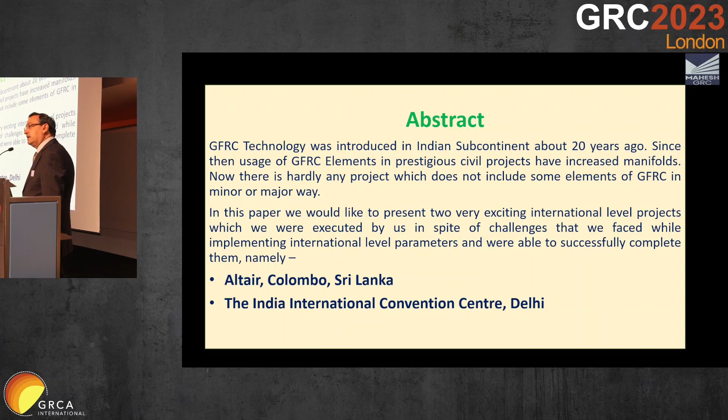First, I would like to briefly introduce my company, Mahesh GRC. We are in this business of manufacturing GFRC for more than 17 years now, and in this period we have done numerous projects and successfully completed them, which includes 5-star hotels, commercial complexes, malls, residences, multi-storied houses, etc.

We take turnkey contracts for supply and installation of GFRC.

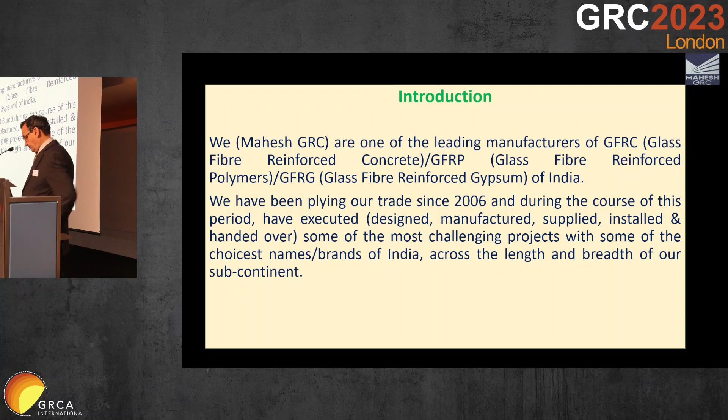Our strength: we have a very large plant located very near to Delhi, about 1 hour away, which caters to the entire country. It's a huge plant spread out over about 30,000 square meters of land. We have experienced staff to handle large projects, and everything in our plant is in-house, from pattern making to mold making, production, finishing, and curing.

We have a dedicated design team in AutoCAD to prepare detailed shop drawings. Technical competencies have been developed through our many years of experience in GFRC making. We have a large capacity to produce GFRC, GFRG and GFRP, presently producing about 10,000 to 12,000 square meters per month, and we have complete in-house testing facilities for GFRC testing.

With our last project, we have also developed in-house steel fabrication for fabricating stud frames in our plant.

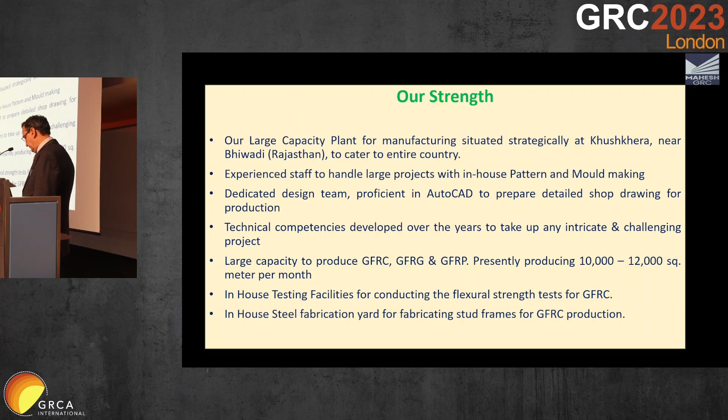This is one of our plant pictures, and here is another plant picture.

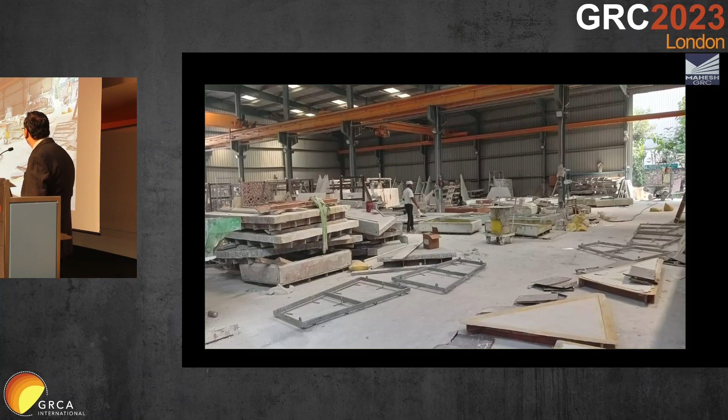Now I would like to speak about this project, the Altair at Colombo, Sri Lanka. This is the tallest residential tower in Colombo, Sri Lanka, standing 240 meters tall. This project was designed by world-renowned architect Moshe Safdie, and as the name suggests, Altair, he made an 'A' letter shape by placing a vertical tower and a slanting tower together.

Our scope of work in this project was mainly in the slanting tower, which was built with diagonal columns and a PT slab on them. We covered those diagonal columns with GFRC fins, which were 600 mm wide, 340 mm deep, and 6.3 meters long.

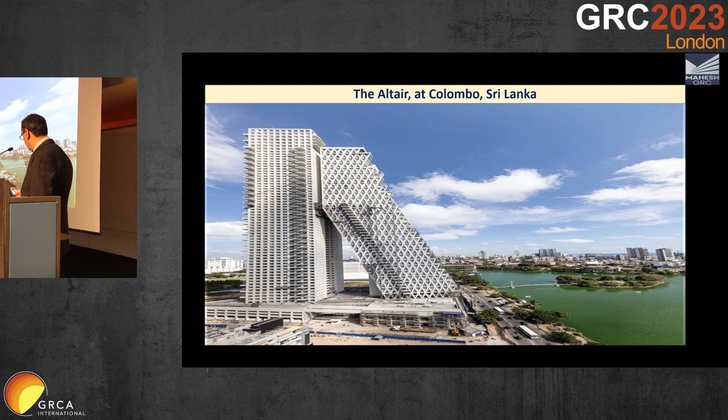Now there were some major challenges we had to face. It was our first international project, and since the GFRC elements were very long and big, like 6.3 meters long, it was not feasible for us to transport them from our plant in Delhi to Sri Lanka.

So we decided to put up a small plant at the site itself. The client gave us some space at the 5th floor level, near the swimming pool, where we set up a small mini plant to produce and install GFRC. All the patterns and molds were prepared in our plant in Delhi, and we shifted them to Sri Lanka to cast the same.

Then there were installation challenges considering the height of the building. So it was decided that all the fixings of the GFRC elements would be done from inside the building, not from outside, because it was not possible to go outside the building to fix the GFRC elements.

Then there were import issues with machinery and raw material to Sri Lanka. Only Portland cement was available locally; the rest of the raw material was initially imported from India. But then we sourced some local raw material, like additives and silica sand, which was a major component of GFRC production, and that was a big help to us.

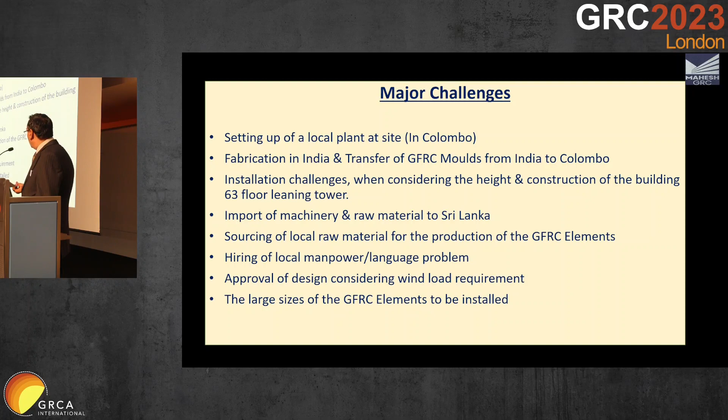Then there was the approval of design for wind load requirement. The wind load requirement in Sri Lanka was very high, at 1.75 kPa, and the building was also very tall, so that was another challenge to get the design approved. And lastly, there were the large sizes of the GFRC elements to be installed.

Now this is a typical shop drawing of the GFRC fin. The GFRC skin was kept only 15 mm thick, and this is the bottom fixing shown. I'll show you with the cursor, just a minute.

We had fixed it from inside by using L cleats, which were galvanized, and SS316 casting sockets were put inside, 2 numbers. Then with the help of anchor fasteners, also SS316, we fixed the fins from the bottom on both sides. Where the bottom of these 2 fins met, there was an SS pin incorporated in the center to connect both fins.

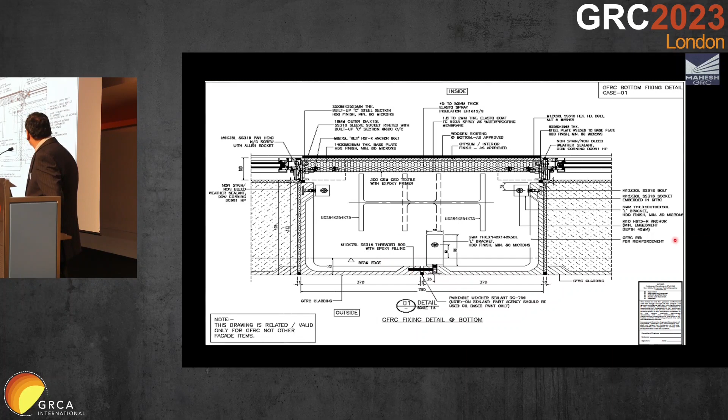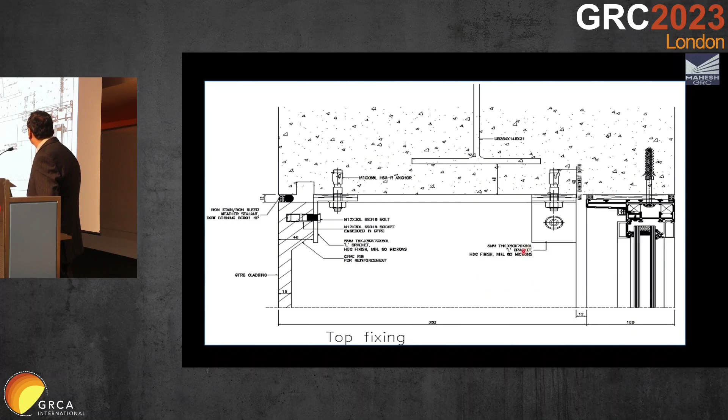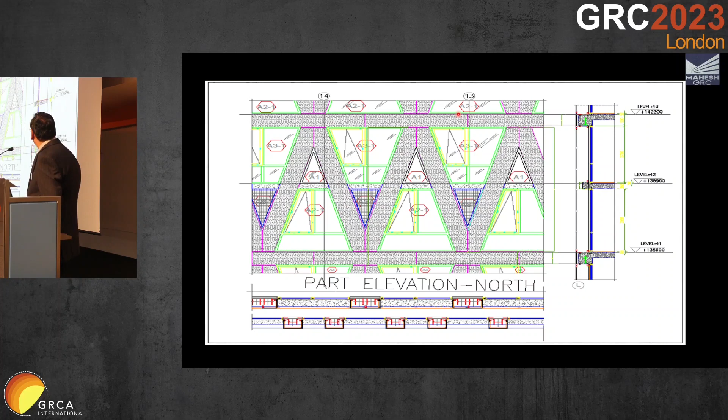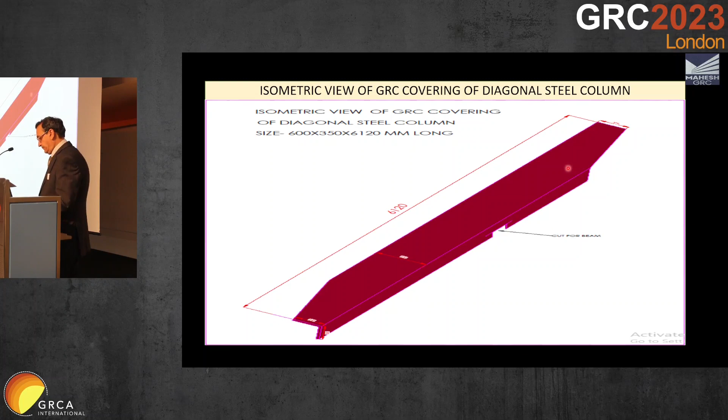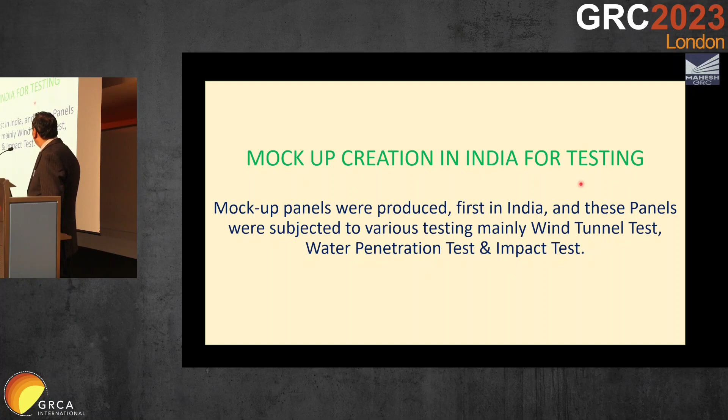Before the actual production started in Sri Lanka, a mock-up was created in India, and it was tested for all the parameters. We first produced some panels in our plant in India, and shifted them to Mumbai, where they were subjected to wind tunnel test, water penetration test, and impact test.

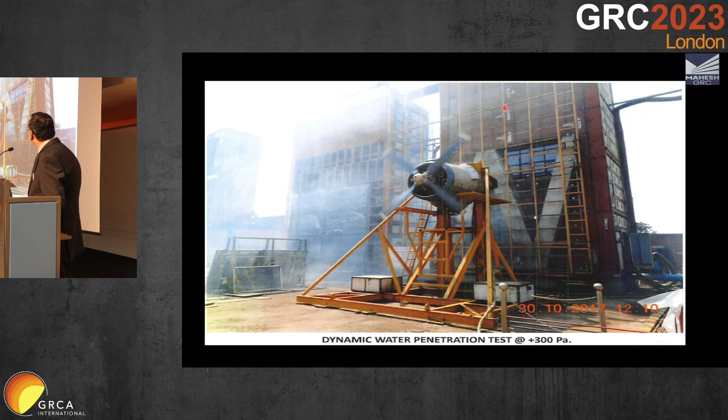These are the pictures of the dynamic water penetration test being conducted on the panels. These are our GFRC panels, and in between are the glass windows and glass facade, and the waterproofing membranes, and everything was created to get them tested.

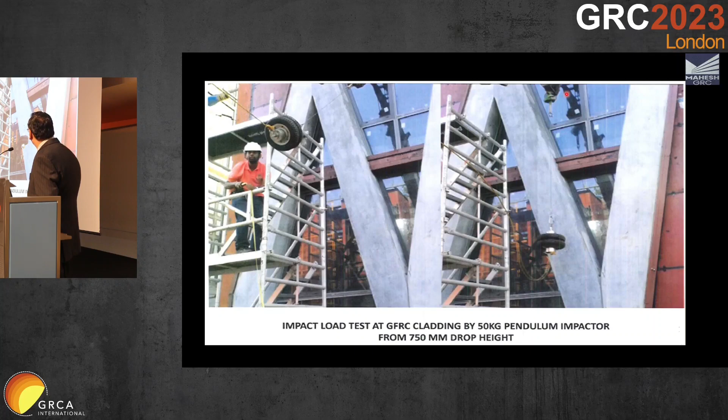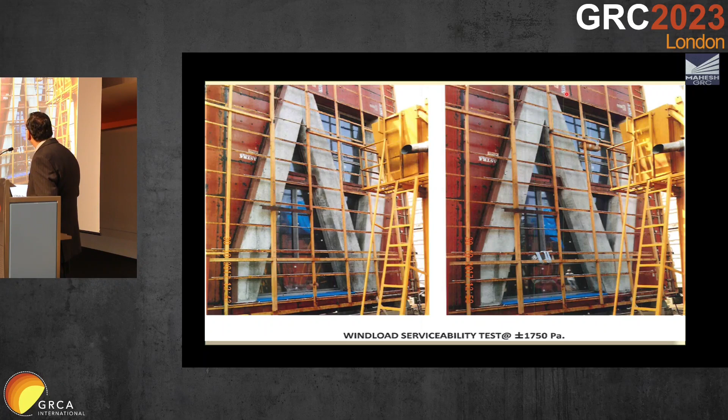This is the picture of the impact load test being conducted on the GFRC fins. And this is the picture of the wind load serviceability test at 1.75 kPa conducted on the GFRC fins.

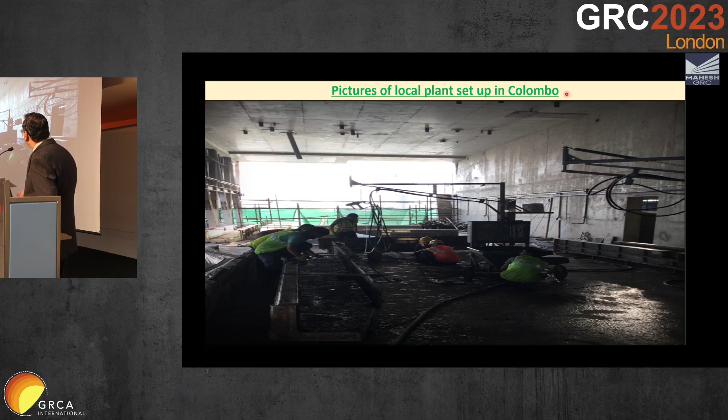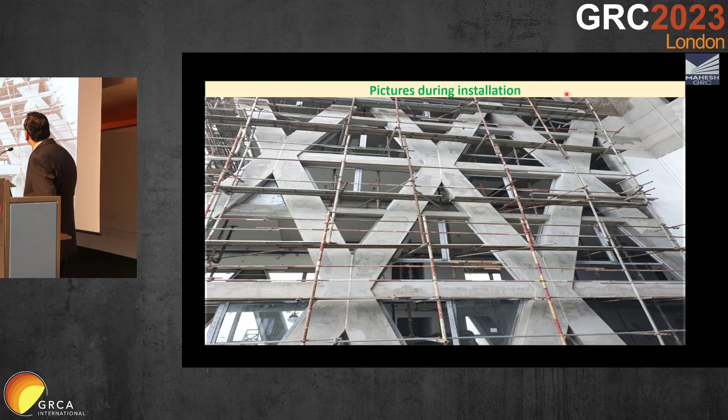Now these are some pictures during installation. Here you can see the steel diagonal columns. First they were subjected to fire retardant paint, and then we put up the fins, and then the glass window was fixed from inside.

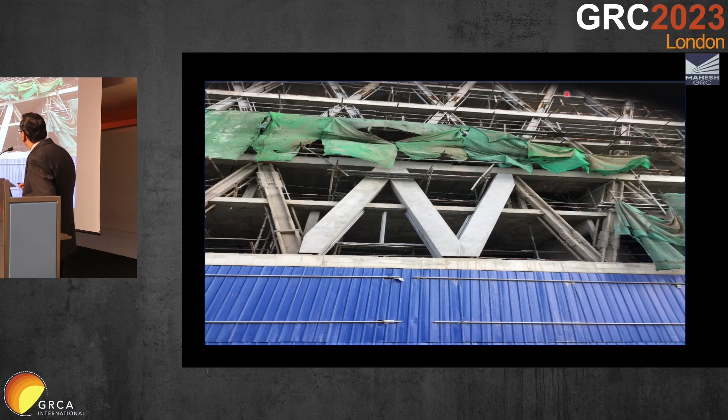These are some completed pictures of the project. These are all GFRC fins covering. Here this line that you see, this provision was made in the GFRC fin for the cradle to move. A cradle was designed to clean the glass windows from outside, and it had to move on a diagonal section as it was a slanting tower.

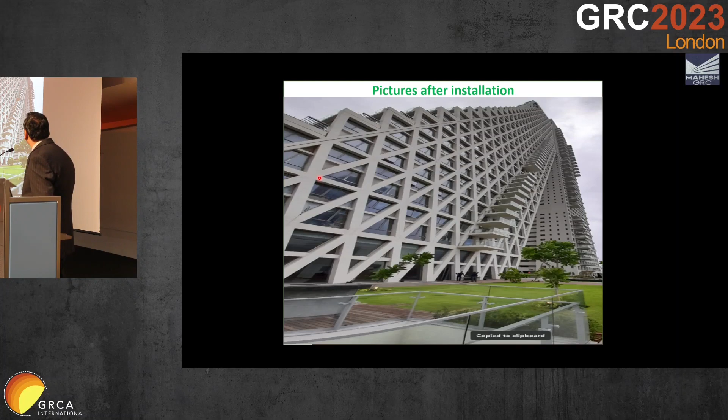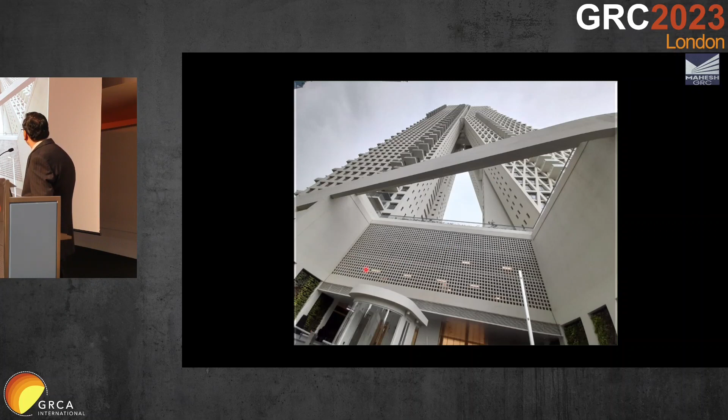This is another picture of the building. Here we had put up some GFRC screens also at the foyer area. This is the final picture of the completed project. It's located very beautifully near the Beira Lake in Colombo, Sri Lanka.

Now I would like to speak about another project, India International Convention Center in Dwarka, Delhi. This is an ongoing project where I am working. This is a very prestigious project, and there has been a very extensive use of GFRC in this project, in the facade of the building. This project is a venue for the G20 summit, so it is being monitored by the Prime Minister's office in India.

The project overview: this is the convention center with a total area of 3 lakh square meters of convention and exhibition complex. This project is designed by IDOM Madrid, Spain, the principal architect, and the local architects were CP Kukreja, Delhi. The facade consultants for this project were Rickard Engineering Australia, who designed the entire facade of the GFRC elements in this project.

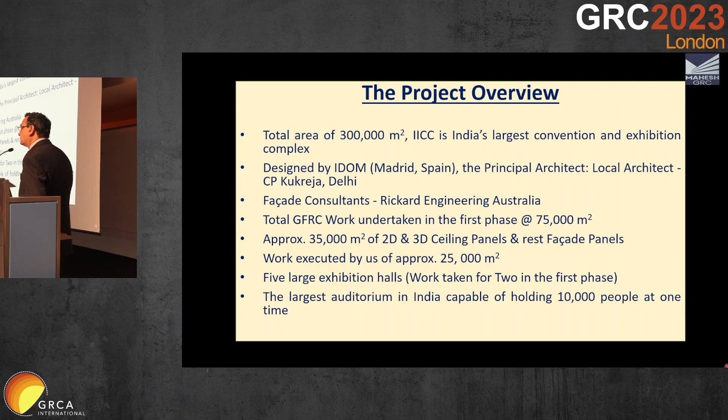There were some initial challenges in this project. Our client L&T, who are making this building, in the initial design that was provided by IDOM, they had shown the GFRC panels to be made with stud frames. But our client, because it was a build and transfer project, was insisting that they did not want to use any steel for any stud frames, and they wanted the panels to be cast without stud frames.

The panel size was 2 meters by 4.65 meters. And they were 3D panels with a projection of almost 350 mm coming out of the building. So it was not possible to make. Then ultimately, they took the services of Rickard Engineering Australia, and with their help, this project has finally come to the shape of completion.

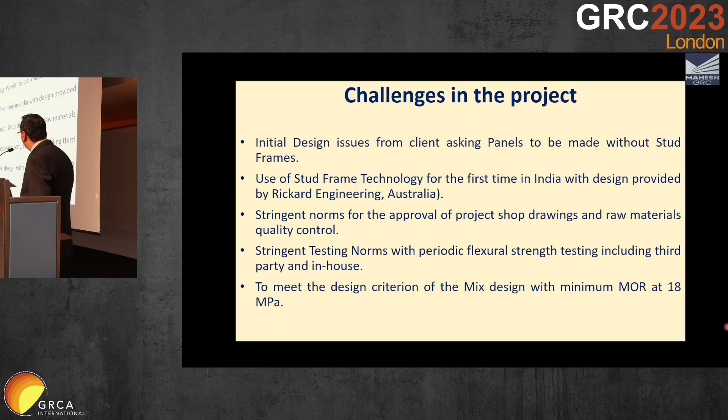And then there were stringent norms for the approval of project shop drawings, raw materials, quality controls. There were also stringent norms for flexural strength testing, which we were conducting every month, in-house and also third-party testing every month. And the mix design which was provided to us had a MOR of 18 MPa minimum that we had to achieve. And we had always been achieving more than 23, 24, sometimes 25.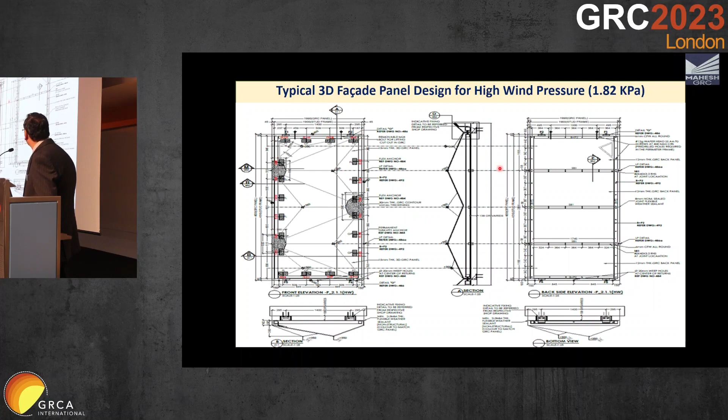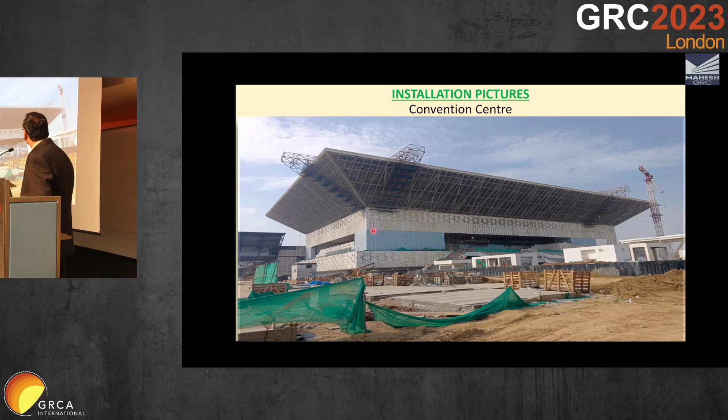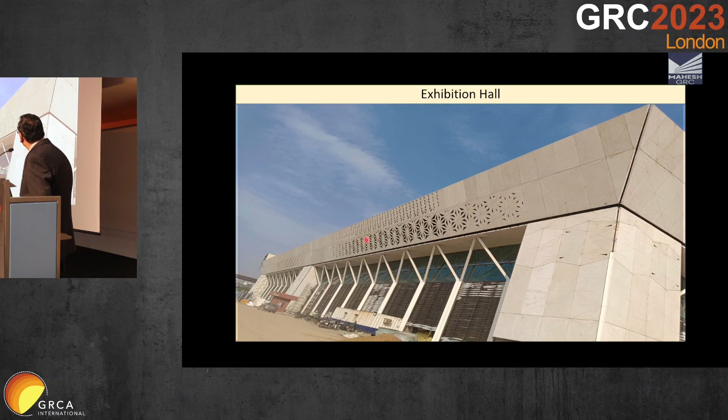These are the site pictures during installation. This is the main convention center of the building. These are the 3D facade panels that you see here. And this is the exhibition hall. In this exhibition hall, we have done these ceiling panels, which you see here. These are all ceiling panels. These are outside, and there are ceiling panels inside the building also. And these are 2D facade panels on the top.

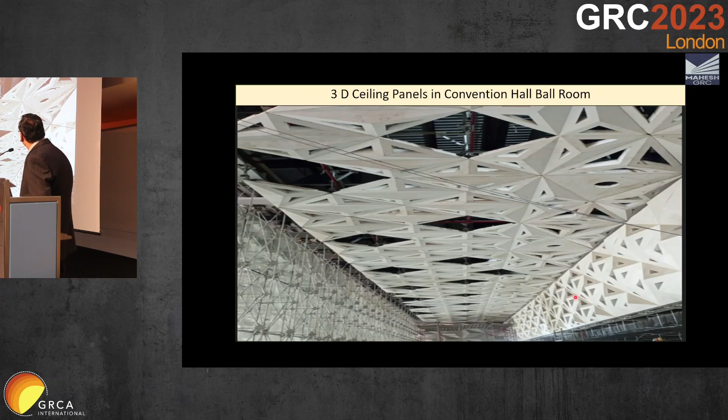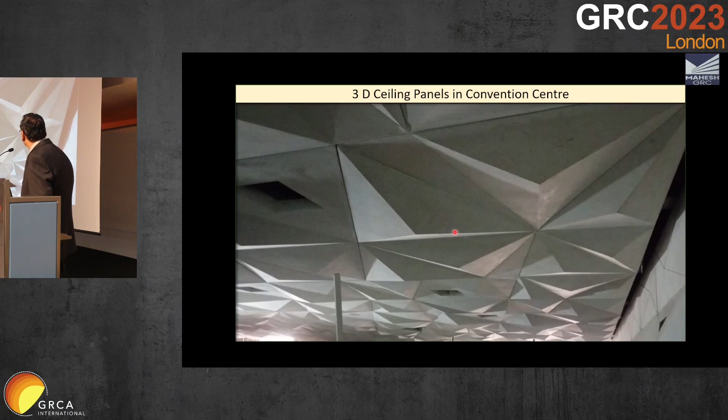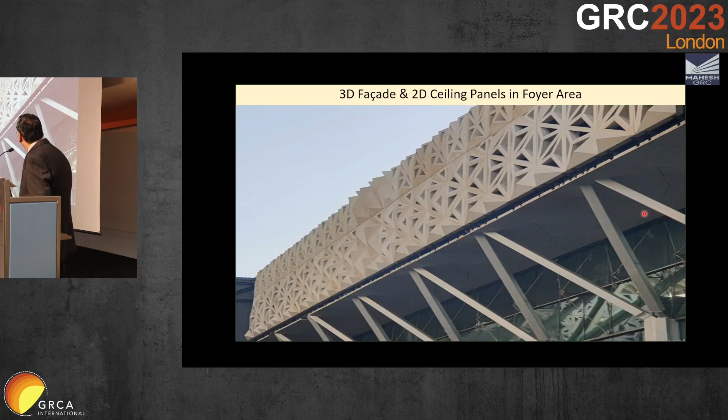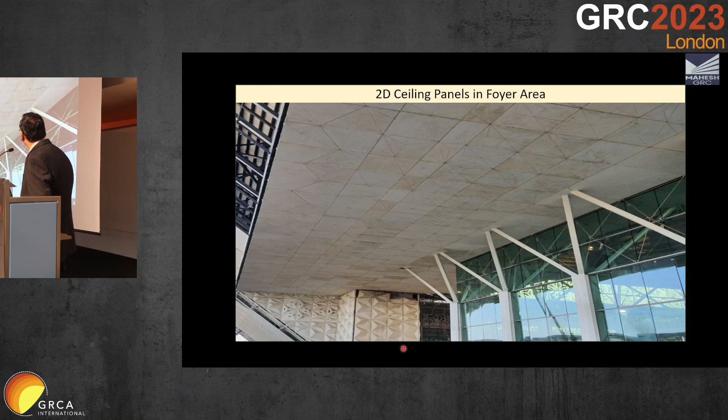Now I would like to summarize my presentation. GFRC-based projects have witnessed a huge potential in the Indian subcontinent, triggered by the completion of some very challenging and exciting projects over the period of time. The introduction of stud frame technology, which has been done for the first time in India in such a big way and started with this project, has become more prevalent now with more projects embracing the technology.

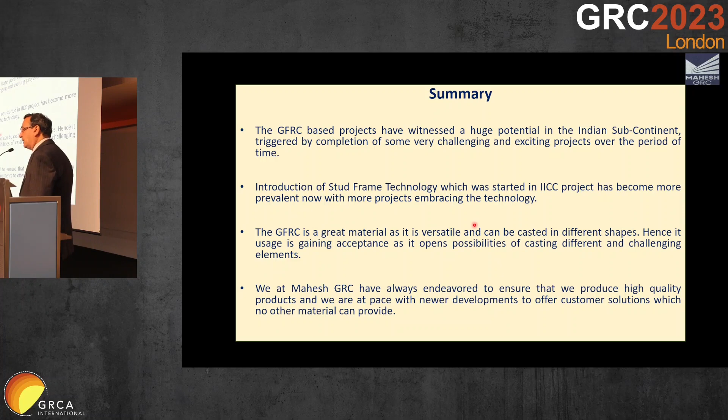GFRC is a great material as it is versatile and can be cast in different shapes. Hence, its usage is gaining acceptance as it opens possibilities of casting different and challenging elements. We at Mahesh GRC have always endeavored to ensure that we produce high quality products, and we keep pace with newer developments to offer customers solutions which no other material can provide. Thank you so much for listening.